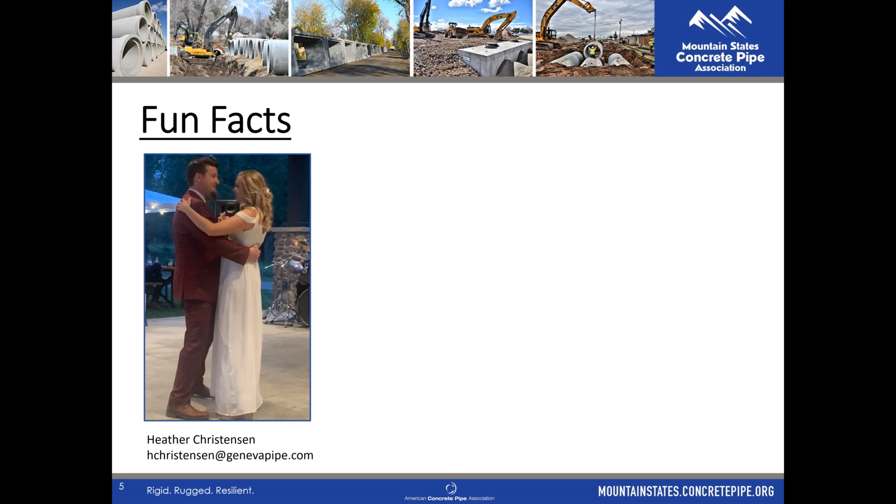But also joining us when they get done with their meeting is Mike Blackham. Mike formerly worked for Oldcastle Infrastructure, left and went into consulting for pipe manufacturers, and now he was hired about a year and a half ago by Geneva Pipe. He is their design engineer and technical engineer. He still lives up in Boise, so he's working out of his home office, but he comes down to the Orem office a couple times a month.

But a fun fact about Mike is that his brother is a professional baseball pitcher for the Oakland Athletics organization, and was traded last year from the Mets organization to the Oakland A's. And so now that he's on the West Coast, Mike and I have talked about going out and watching him play a little bit more, where it was a little bit tougher to get out to New York to watch him play. So we're excited about that.

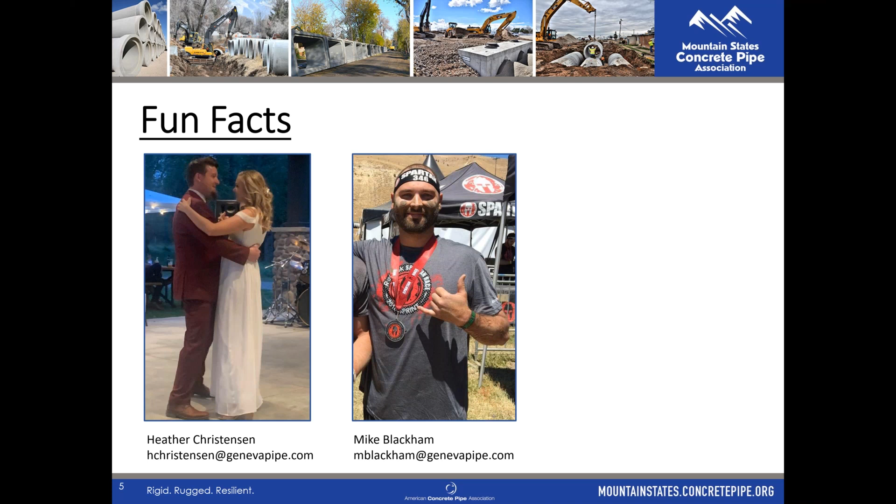And lastly, and we do have him with us on the line today, is Jeff Peck with Oldcastle Infrastructure.

Jeff Peck is the closest human embodiment of the fictional character Ron Swanson from Parks and Recreation. Jeff does not like to be on the grid, just like Ron, and so it was a little bit tougher to stalk him and find a picture of him. So I just decided to show a picture of Ron Swanson because that's kind of what Jeff reminds me of. Fun fact about Jeff is he's the one that got me into guns. Before I met Jeff, I owned 0 guns. When I started working for the association 5 years ago, about a year in, he got me into shooting, and we would go shoot shotguns and different guns. And I had so much fun that Jeff got me into purchasing firearms. So in the last 4 years, I have gone from 0 guns to now I own 10 guns. So that's pretty exciting.

I used to joke around and tell people that I was a Utah Democrat, and they would say, "What does that mean?" And I said, "I have less than 10 guns." And now that I have 10, I guess that might make me a Republican now. I don't know, I'll have to see.

So just got a text from Jeff that his control seized up, and he doesn't have any microphone control, so he can't defend himself either. But we do want to welcome Heather with us. Thank you, Heather, for joining us. I was just giving some fun facts about the group, and you weren't here to defend yourself.

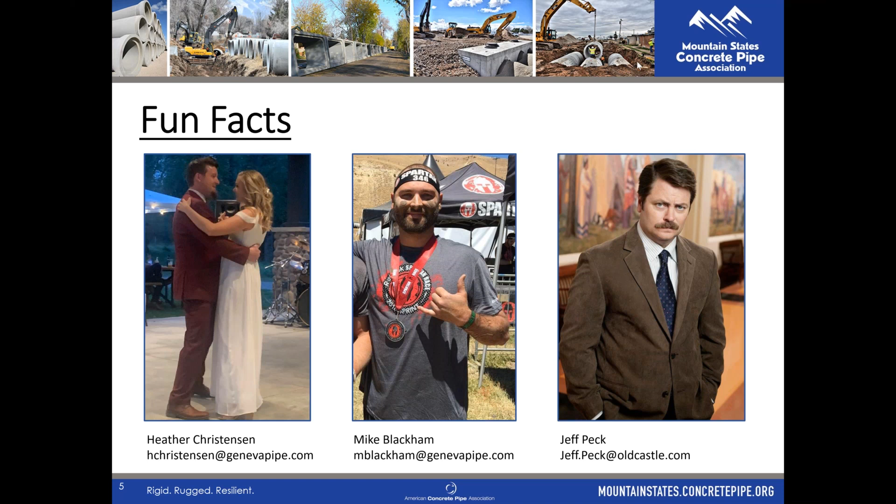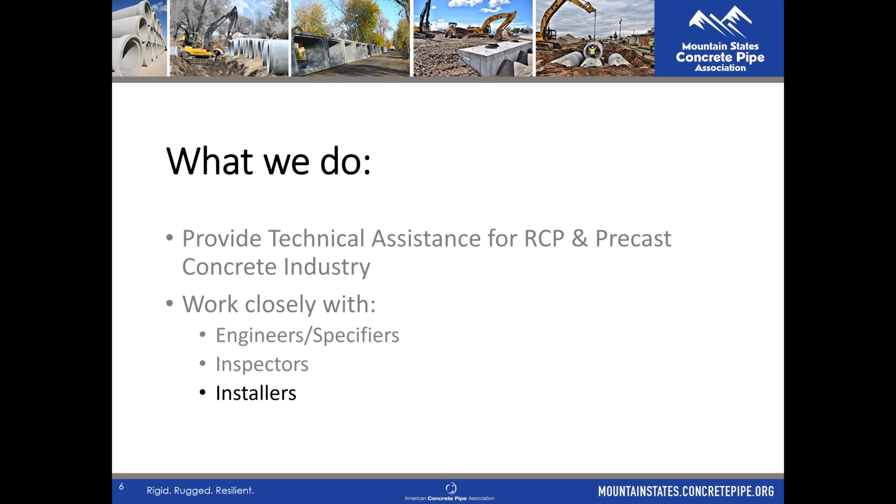So let's talk a little bit about what the association does here. Our primary goal is to provide technical assistance for the RCP, reinforced concrete pipe, and precast concrete industry. And in doing this, we work closely with engineers and specifiers, inspectors, and installers, whether they're independent contractors doing work, or your own city installers, to ensure that our products are being not only designed, but specified and installed and inspected correctly. We want to make sure that our products are going in the ground correctly. That's our number one goal.

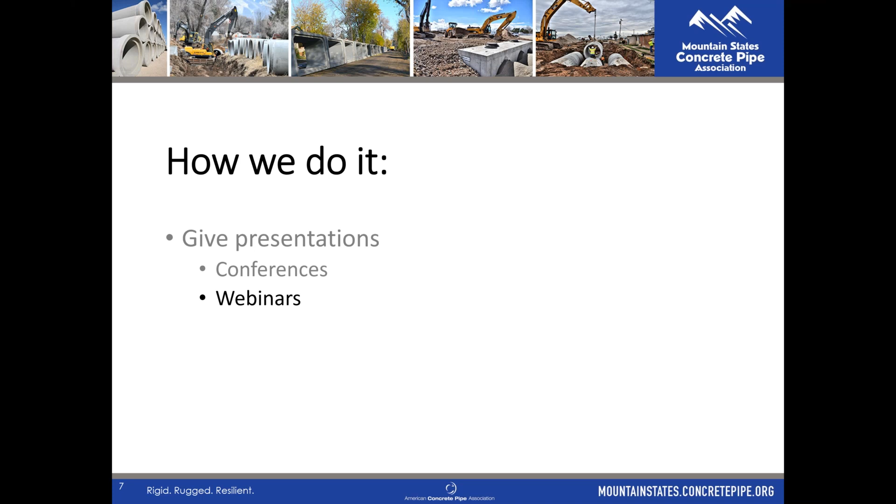And how we do it is we give a lot of presentations, as is obvious by you being here today. We typically present at conferences. Because of the COVID virus and the quarantines and the shutdowns, we've employed more webinars, which have been very successful and very well received. What we like about those is we get to record them and you can watch them at any time. So it's very helpful if you see something that you want to watch again.

But we also have done lunch and learns. We hope that by the middle to end of this year, we're going to be back into folks' offices and be able to do some lunch and learns, bring lunches in and answer your questions there. We also review and write specifications with people. So if you have projects that you're working on and you're unsure how your specifications measure up and you want us to review those, we are more than happy to do that. We have a lot of experience in reading and writing specifications.

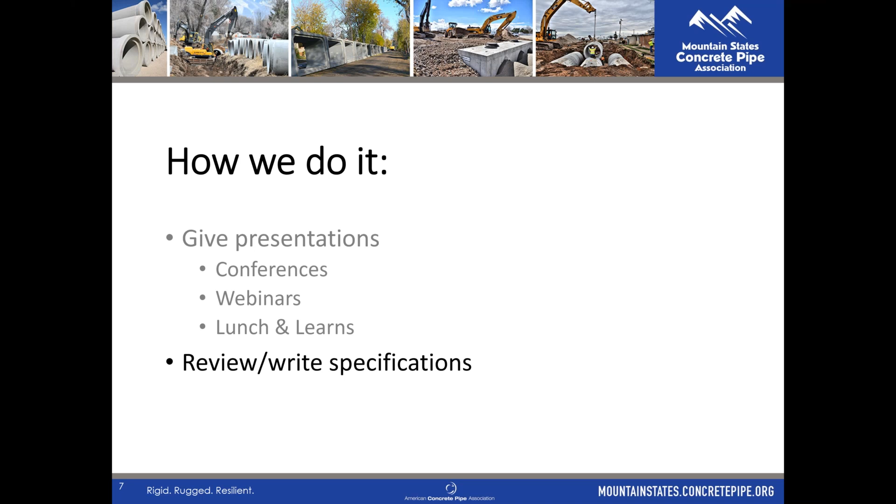Heather, Jeff, Mike, myself, we all sit on national specification committees that work with ASTM, AASHTO, different national specs for concrete pipe. So we have a lot of experience and a lot of contacts across the country with specifications, and we are more than happy to help you make sure that your specs are as good as they can be. We also answer a lot of constructability or design questions. I'll talk about that a little bit later in this presentation, on some of the questions that I've received and how we can help with that.

So it's a really fun job. I really enjoy what I do. I know Heather and Jeff and Mike really enjoy working with people and helping make sure that our products are being spec'd correctly. So it's a lot of fun. If you have any questions, feel free to reach out either by email or phone. We're more than happy to help you out there.

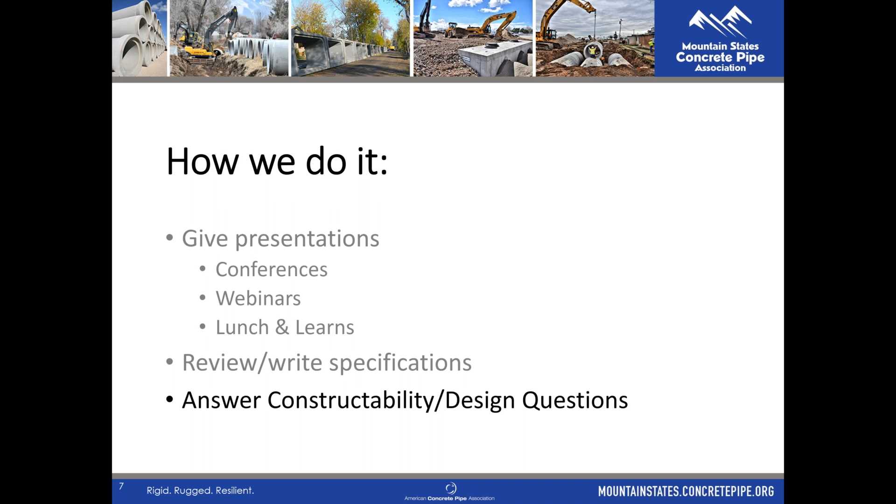So now we've got some new things that we're implementing this year. If you've watched any of our video newsletters from the last couple of months, you've probably seen some of them. First of all, as I mentioned before, this is our first webinar as part of our Mountain States Concrete Pipe Academy. This is a cool new program that we've implemented this year. I put the web address at the bottom of the screen if you want to write that down, or you can go and visit that.

If you go to the website, this is what it looks like. You can click to register for all the various webinars we've got coming up. Once this webinar is over today, I'm going to make it available to register and watch at any time. It'll be on this same page, but instead of being an upcoming webinar, we'll put it under the past webinars that you can still view. So anybody can get on and view this at any time for the whole year. So if you want to go and watch it later, you're more than welcome to. If you miss one of the webinars, you can watch it at any time between now and the end of the year.

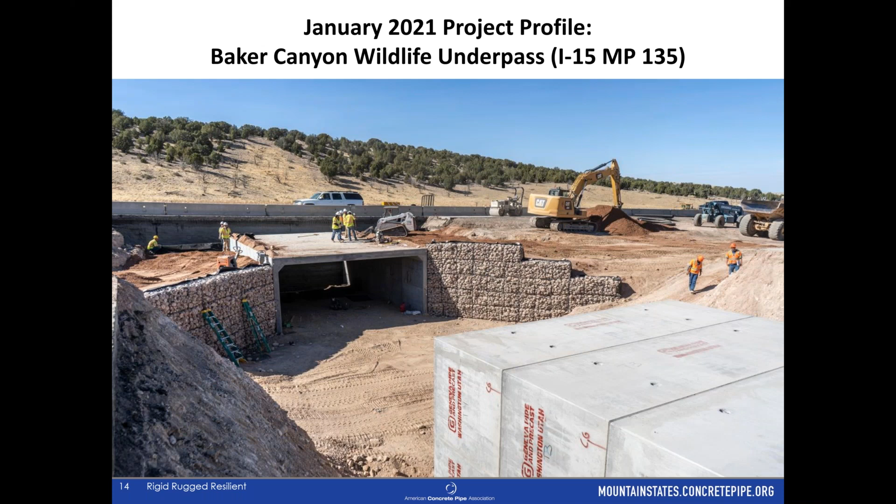But anyways, thank you, Heather, for that information. This has been a great project. It's been recognized across the state. And one thing that we're going to be doing with these project profiles is each month we will be highlighting a new project. So you can look at our website and we'll put it on social media and share it with everybody. The criteria is if it's either reinforced concrete pipe, box culvert, or any unique precast situation that we think would be beneficial for you engineers and designers to look at.

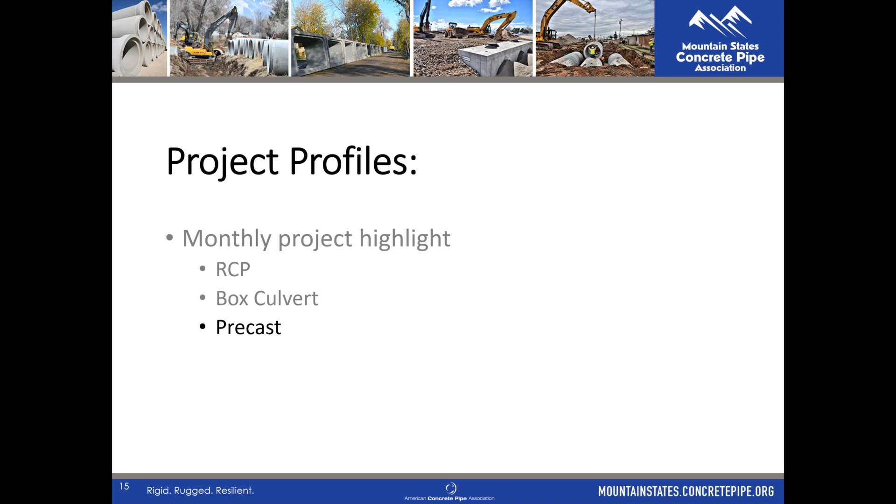And then at the end of the year, from the 12 that are posted on our website and that we select throughout the year, we're going to select one of those to win a Project Achievement Award from Mountain States Concrete Pipe Association.

So we'll be presenting the design engineer, the contractor, and the owner of the project with a plaque and a framed picture that talks about the project, and award them the Project Achievement Award, and hopefully pass those along each year to our national association that does a Project Achievement Award every year as well.

So if you have a project that you've worked on that meets any of those criteria, either a box culvert, an RCP, or any unique precast project that you think would qualify, send that our way. We would love to see what suggestions you have on including a project in this project profile. We'd be more than happy to take a look at those and try to select one to help get some notoriety for you and your project and your company. So keep that in mind. If you want to do that, feel free to just email us and let us know that you would want your project to be considered for that.

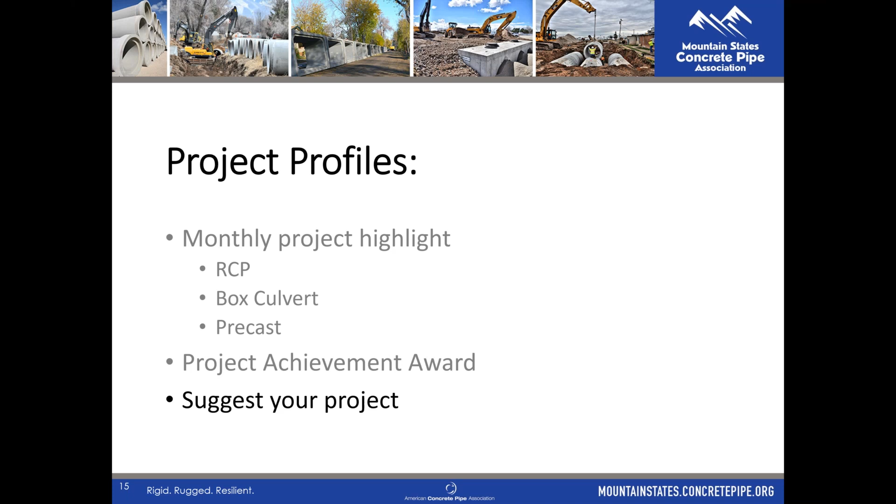Yeah, and one more comment on that, Jason: the American Concrete Pipe Association does their National Project Achievement Award. So that's basically everywhere in the States, but they have different criteria than what we're working with. We want to recognize all precast projects, no matter who the owner is, but for national, it has to be a DOT project. So we'll have to select the ones from the DOT projects that we look at through the whole year and see which ones we can send off to national.

And then what happens is if they get selected as the American Concrete Pipe Association Project Achievement Award, ACPA actually presents them that award at the annual AASHTO conference, if I'm not mistaken. And so that's pretty cool because then that's recognizing the state. So we're looking for a lot of DOT projects, but ultimately the Mountain States Project Achievement Award doesn't have to be confined to just DOT projects. If you've got a really cool job that's not with UDOT, certainly we still want to consider it and put it in as a nomination.

Perfect. I love it. Yeah, that's a great point there. So there are the ones we'll be selecting to pass on, the DOT projects, but to win our Project Achievement Award, it can be any project that was done throughout the year. So whether it's a private, or a city, county, or state job, we'll be selecting from there. Great point, Heather. Thank you so much for that.

All right, some takeaways here. The three big things we're going to be talking about today, and we're going to zip through them pretty quickly: we're going to talk about some basics of reinforced concrete pipe, we're going to discuss briefly some manufacturing and testing criteria, and also a little bit into design.

All right, perfect. Well, let's go ahead and talk a little bit about concrete pipe here, and what the 2 basic critical functions are for concrete pipe. So, buried pipe must perform 2 critical functions. Heather or Jeff, either of you want to jump in and take a stab at what those 2 critical functions are?

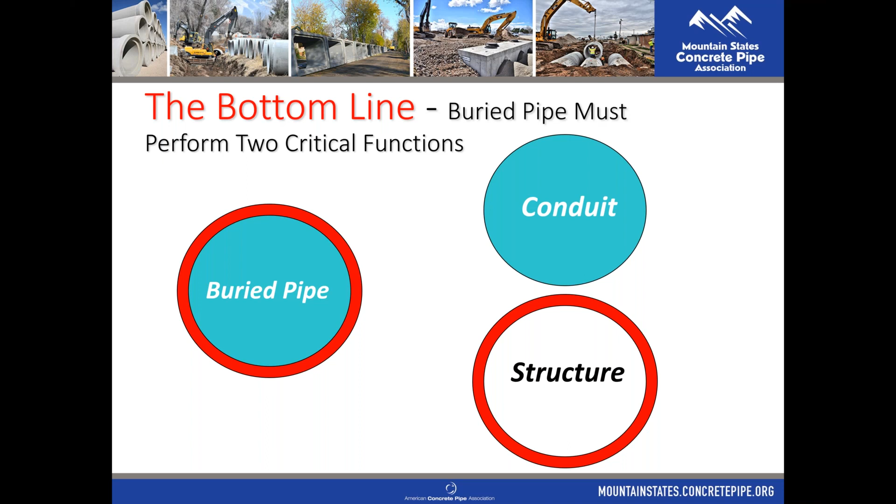Jeff, if you want to jump in, go ahead. Well, one of them certainly is structure. Certainly structure, of course. And the second? Heather, you want to take that one? It's obviously got to be a conduit, so it's got to absolutely convey fluid. Absolutely, conduit and structure. Most of what we do is mostly drainage pipe, so the conduit is typically to transmit the water, mostly by gravity, obviously with sewer or storm sewer. But yeah, conduit and structure.

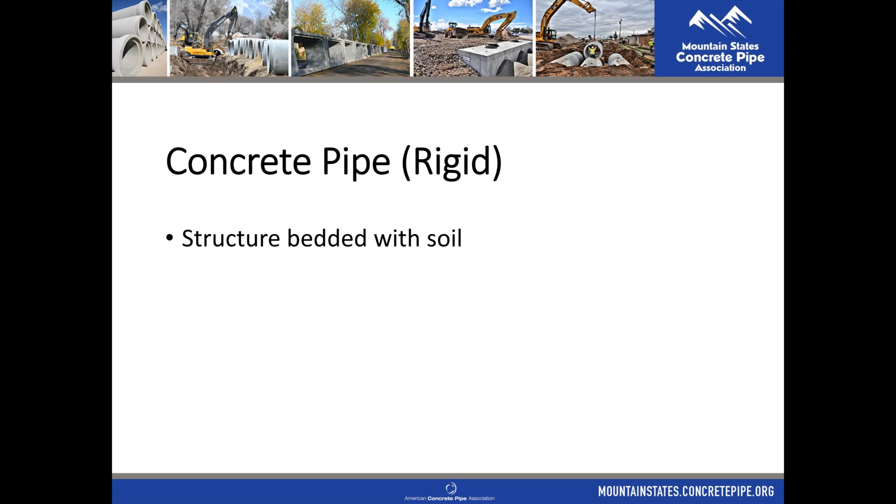Now, concrete pipe is what we call a rigid structure, a rigid pipe, and that is a structure that is bedded with soil. That's a little bit different from some of the flexible pipes, so we're not going to talk about those today. We're just going to focus solely on concrete pipe, but it's a structure itself. So when you get concrete pipe delivered to your job site, we are delivering an actual structure to the job site, and then it is bedded with soil. We'll talk a little bit about the specifications for the installation and the manufacturing of that, but we are building and delivering an actual structure to the job site.

Now, when you look at what percentage of the structural system is handled by the pipe itself, depending on the class, the type of bedding, the foundation and the backfill, you could see anywhere from 70 to 90% of that system strength coming from the pipe wall itself. So that pipe is responsible for transmitting and carrying a lot of that load. It's really remarkable how much that pipe has to handle, right? So it's very important that we take great care when we manufacture it to ensure that it meets the design criteria and the loading criteria, and that it's transported efficiently and safely, so that we're not damaging the pipe as it gets there, because that structure is so important.

As I mentioned before, depending on the class, the foundation and the bedding could account for as little as 10%, up to 30% of the system strength. That's about opposite with a flexible system, where you see 5 to 10% on the pipe itself, and 90 to 95% on the bedding and foundation. So you've got to really be careful, making sure that we're designing and installing these products correctly.

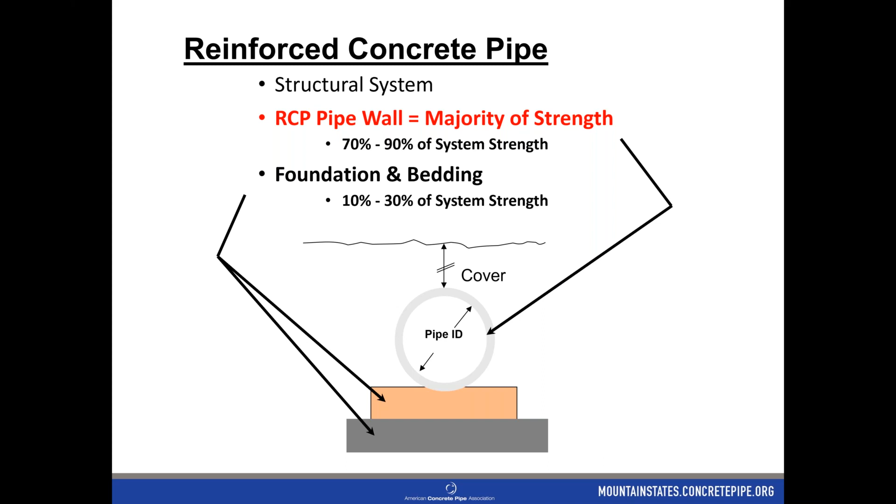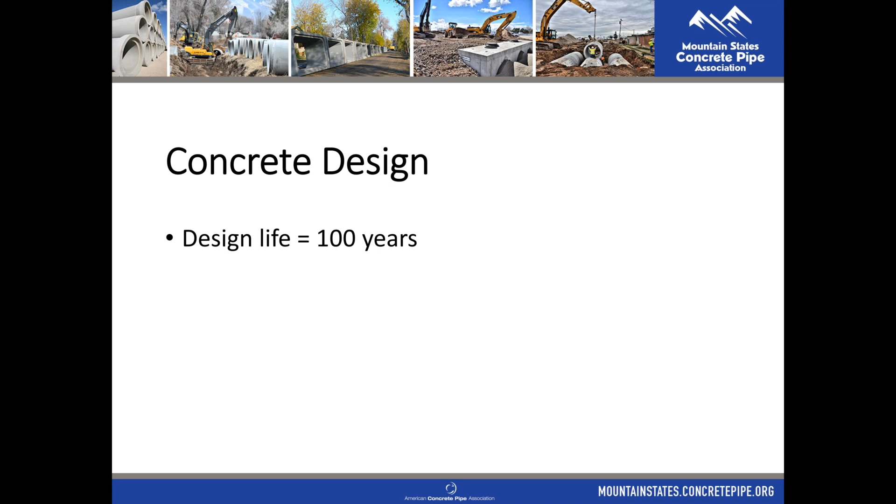A couple of other things with concrete design that we want to keep in mind: your design life for a concrete pipe is typically 100 years, even though we have plenty of projects in the ground that are so much older than that, and I'll talk about some of those in a moment. From a hydraulic standpoint, we're not going to get too much into hydraulics today, but a Manning's n recommended by our plants is 0.012. We'll see different values. I've seen engineers use 0.011. That's okay. 0.013 is pretty common, but we recommend 0.012. Even though in some of our lab tests we've gotten some concrete pipes down as low as 0.009, 0.010, the recommendation is to use a Manning's n of 0.012.

As far as structure, as I mentioned before, each of our plants has structural engineers. Mike Blackham, who I introduced you to earlier, is the engineer for Geneva Pipe. Troy Banks is the engineer for Oldcastle, and they are certifying and stamping these designs. So the plant itself assumes the liability for that structure. We're also assuming that the contractor is handling and installing it correctly, and that it was designed correctly. But as far as the standard classes and meeting those criteria, our structural engineers assume that liability, and they stamp those designs to say, yes, this pipe was manufactured correctly and it will meet these loads.

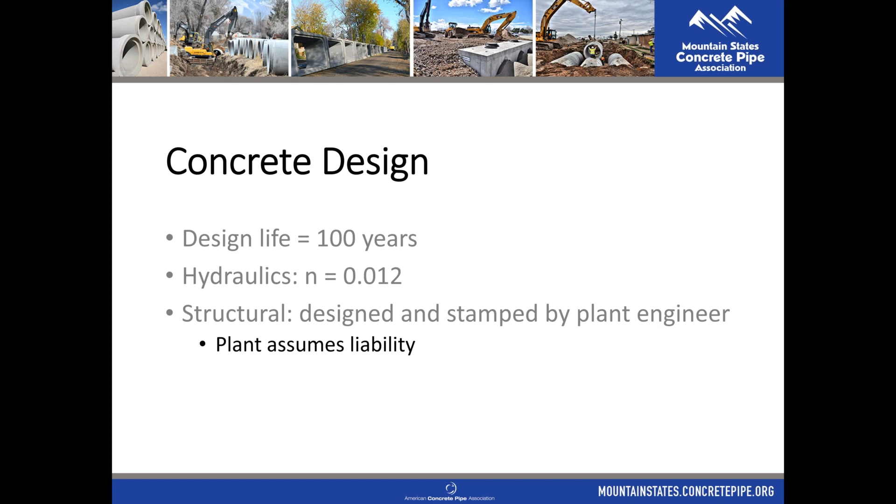This is a pipe that I'm really fascinated by. This was installed in 1842 in Mohawk, New York. This was an old sewer line that they upsized in 1986, so it was in the ground for almost 145 years, 144 years old when they removed it. It's interesting because if you go to the American Concrete Pipe Association's office in Dallas, Texas, they have a section of this pipe in their office so that you can go and look at it.

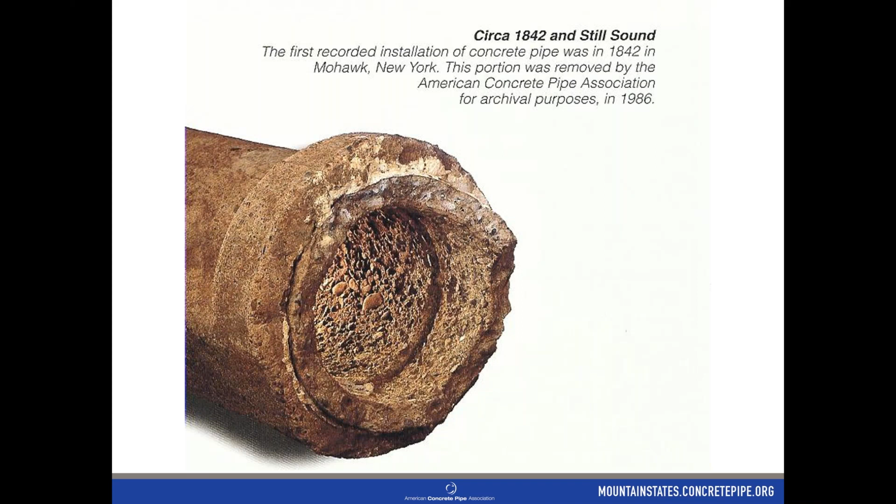Structurally, this pipe was still fine. It still met all the structural requirements that it needed to after 144 years in the ground. The only issue was it was too small. They had some growth and needed some additional capacity in that line, so they upsized it after 144 years. And so structurally, it was still very sound. And so these pipes, they can last. We mentioned 100-year design life, but some of these pipes will last even longer than that.

This is an interesting project that's more local. That one in New York, that was an old pipe. This is one in City Creek down in downtown Salt Lake. Back in 1908, there was some major flooding in City Creek, and so they decided to pipe a large portion of that. And so they put in a 7-foot diameter pipe from 400 West to 900 West. This was back in 1909.

And for any of you that were wondering, for that 4,000 feet of 7-foot diameter pipe back in 1909, the low bid was Davis and Huser, and they bid it for $48,252 for 4,000 feet of 7-foot diameter pipe, 8 inches thick, reinforced. So kind of a cool little project there.

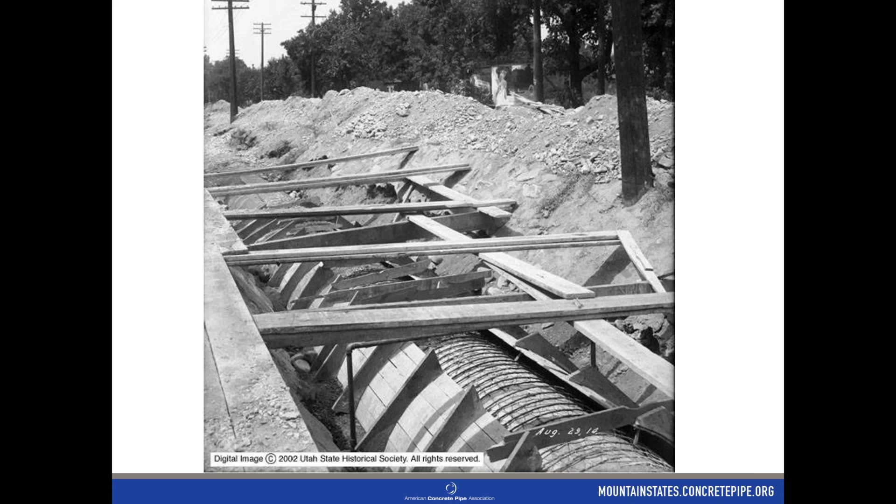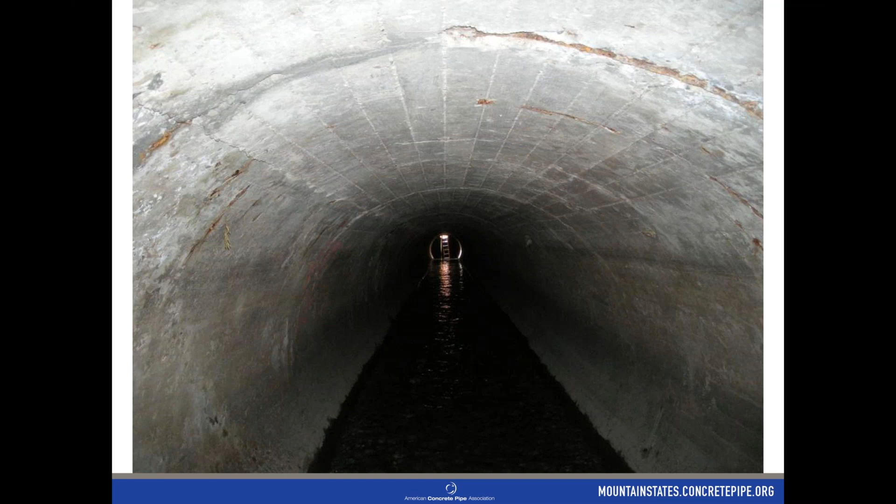Here's some more pictures of it. You can see the forms that they've set and the steel that they've got in there. And this is that same location completed after they stripped the forms. And this is what it looks like today. A large portion of that pipe is still in service today, and it's still functioning fine after over 110 years. Kind of a fascinating thing there.

So one of the things that the American Concrete Pipe Association has that you as engineers can use is a cool little app that they've developed that's a free download. Just look for the Compare Flow app in the App Store, whether you're using Apple or Android products. You can download it to your phone, and you can compare flows of different products and different materials.

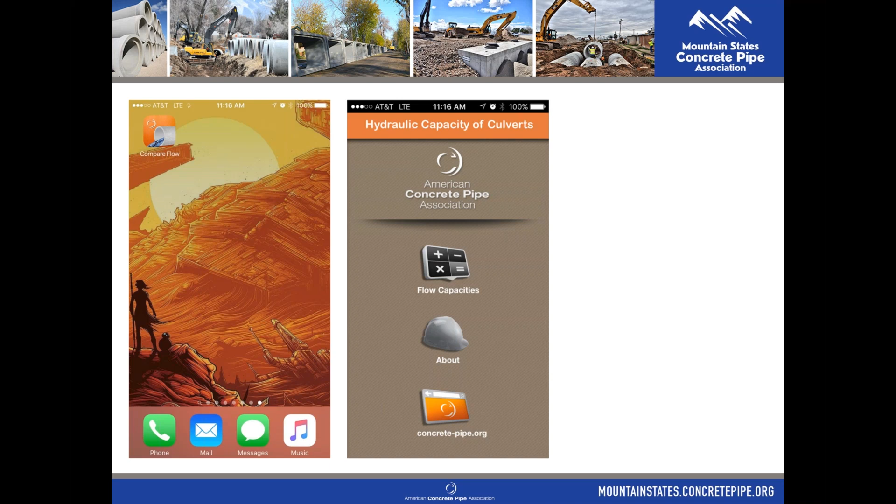And so if you want to do just a quick calculation to see what size of pipe you're going to need, whether you want to use concrete pipe or plastic or corrugated metal, or if I can't do a round, what if I need to do a box culvert, you can compare flows of different things. This is what the app looks like when you download it. It's just that little orange app in the top left-hand corner there. When you open it, it's called the hydraulic capacity of culverts. You go to the flow capacities, this screen opens up, and you can choose circular concrete pipe.

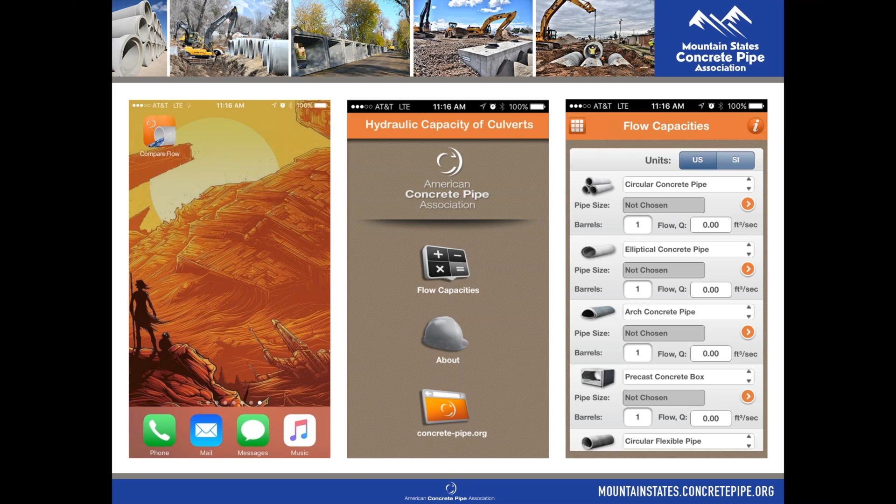We get a lot of questions about elliptical pipe. What's the flow difference? What's the change? So you can look at elliptical or arch. We don't make a whole lot of arch in this market, but usually we get most of our questions comparing between circular, elliptical, or box culvert. You can also enter in flexible pipe and see what the difference in flow capacity would be from those corrugations versus a smooth lined pipe.

It's kind of cool. This is the output once you punch it all in there. This is for a 24-inch pipe with a roughness coefficient of 0.012, and it gives you your flows down there at the bottom. You can choose different materials. So whether you want to look at a profile walled PVC or a solid wall or SRHDPE, corrugated metal, it changes the Manning's n and shows you the difference between different pipe flows.

And so you can see that if you're comparing a concrete pipe versus a corrugated metal pipe, one can handle almost 35 cubic feet per second, the other one's only 23 cubic feet per second. So it's a pretty big change when you start thinking about the corrugations and different pipe materials. So that's a free app that you can download.

It's kind of cool to have just on your phone if you're out in the field and you need to do a quick calculation and see what flows are. Feel free to download that. It's kind of a cool little thing there.

Heather, go ahead. One other thing is if you're interested in using this app, or maybe you want a little bit more information, I know ACPA, American Concrete Pipe Association, did a webinar back in 2020, and I believe they threw it on YouTube. So Corey Frazier, I think up in Washington State Concrete Pipe Association, and then Trig also put together a presentation on this. They did a really good job. They went a little bit more in depth. So while we can't go that in depth in this presentation, if you're looking for more information, shoot Jason an email. He can send you that link to that webinar too.

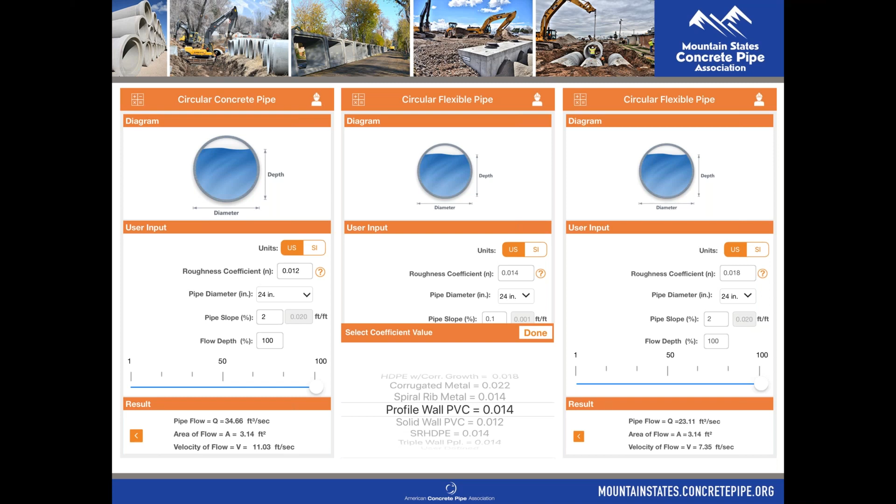So let's talk a little bit about specifications. I know all you engineers out there, this just gets you really amped up and excited about talking specifications. There's three main specs for reinforced concrete pipe. The ASTM C76 is manufacturing spec. As I mentioned before, Heather, myself, Mike Blackham, I believe Jeff Peck, a couple of others from Oldcastle, we have people that sit on these ASTM. It's called C13, the committee that writes all these specifications and approves them. And so we sit on there and we have discussions with other engineers about these specifications.

But you've got C76, which is manufacturing, C497, which is your testing spec, and C1479, which is installation. We're going to focus mainly on C76 today and a little bit of C497. 1479, when we talk about the installation of concrete pipe webinar that we'll be doing in a few months, we'll be focusing almost exclusively on 1479. So we'll talk a little bit more about that later, but we're not going to focus on that one today.

Actually, you know what? Let's go ahead and do our second poll right now. I'm going to pull up the second poll. And the question is, how many standard classes of circular RCP are there? These are standard classes. This is not like special design. How many standard classes? 3, 4, 5, 6.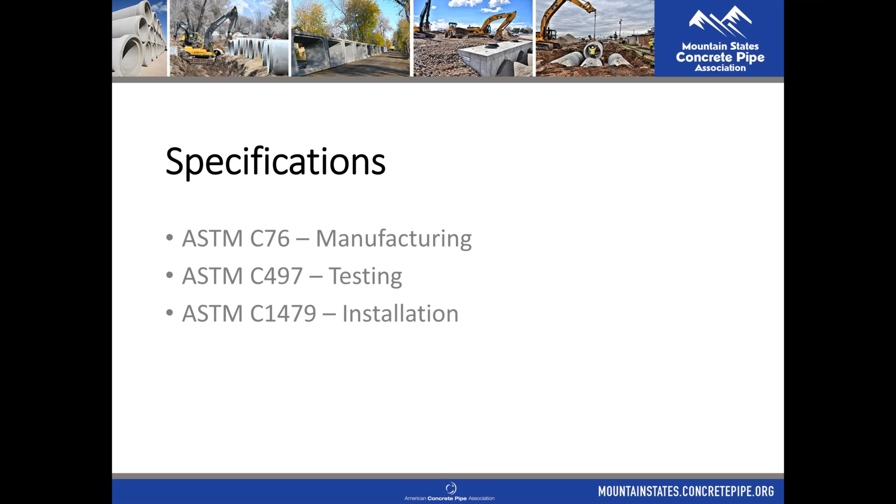So we want to make sure that we have steel in those tension zones to ensure that we're not cracking the pipe. We know that concrete is going to crack if it's loaded. So we want to put steel in there to either minimize the cracking or eliminate it altogether. Because the tension zones are on the inside of the pipe at the flow line, which is the bottom, and the crown, which is the top,

you're going to see the cracks manifest on the inside of the pipe there. But the tension zones at the spring line, which is that midpoint, if you were to cut the pipe in half horizontally, it would be that horizontal line right in the middle of the pipe. That is called the spring line of the pipe. And you see the cracks happen on the outside of the pipe because those tension zones are on the outside.

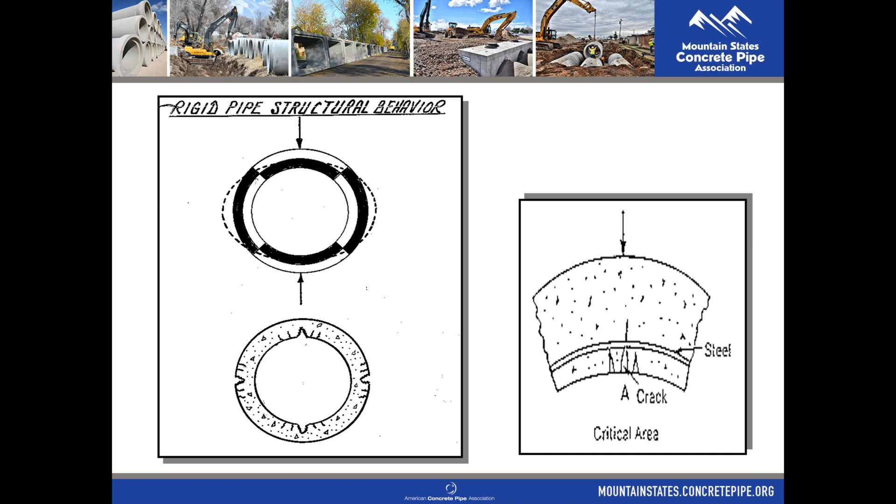And then you've got ultimate load. Ultimate load is once you load that pipe up to the failure point. We want to know at what point it's failing, right? So when you go through this table, on the left-hand side you've got the pipe diameter. This is the inside diameter of the pipe. You've also got your different wall thicknesses, wall A, wall B, and wall C.

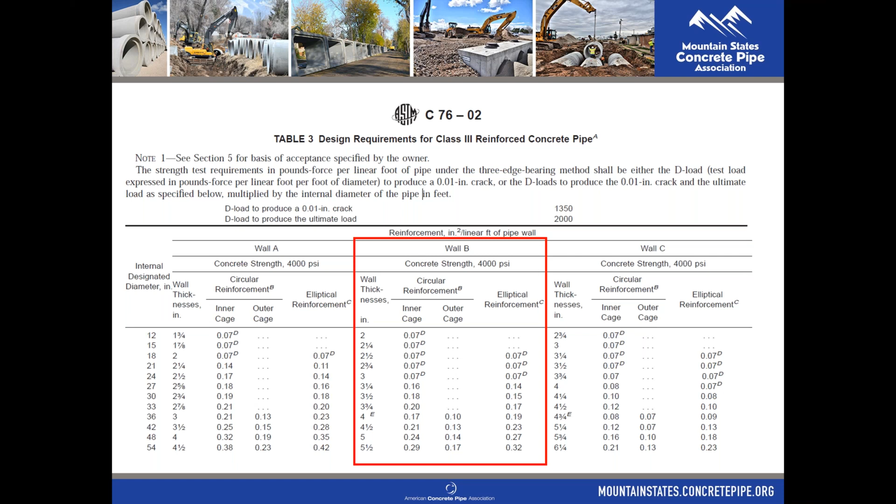Wall B is the most common that we use in our market here. You see a lot of B wall, and B wall is cool. Those are the forms that we're using, and the B wall is nice because it has a real easy way to calculate your wall thickness. But as designers, we need to keep in mind what our wall thickness is, to make sure that we're calculating the correct cover and the correct cover requirements.

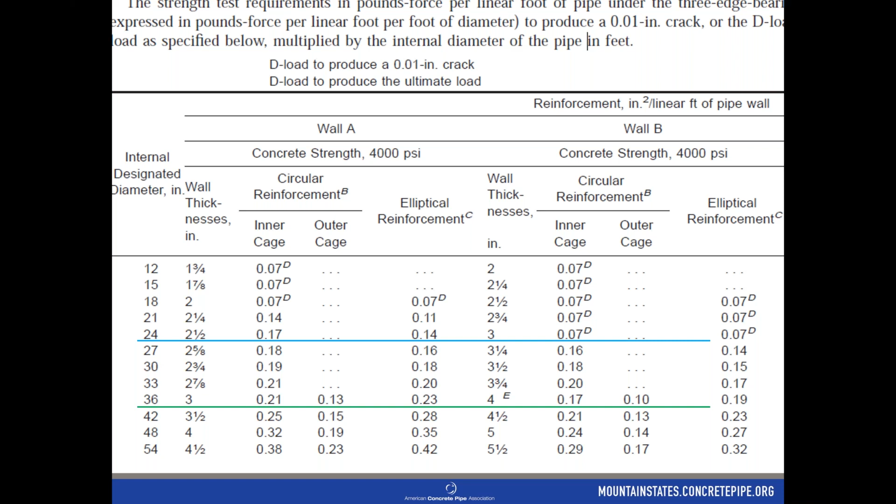So the simple calculation for wall thickness on a B wall is you take the diameter in feet and you add 1 inch to it. So for a 24-inch pipe, that's 2 feet in diameter, and then you add 1, so 3 inches is the wall thickness. If you had a 36-inch pipe, that would be 3 plus 1 inch, 4 inches thick. If you have a 30-inch pipe, notice I didn't highlight that, but 30 is 2.5. You add 1 inch, it would be 3.5 inches. So it's actually really easy to calculate that.

For strength classes, as Heather mentioned, there are 5 strength classes. Class 1 is going to be 0 to 800, and that is pounds per foot of diameter per foot of lay length of pipe. So pound per foot is not pounds per foot squared. It is pounds per foot of diameter per foot of lay length of the pipe. Class 2 is anywhere from 800 to 1,000 pounds. And this is the load to produce that 100th inch crack.

Class 3, as I said, is 1,000 to 1,350. Class 4 is 1,350 to 2,000. Class 5 is 2,000 to 3,000 pounds, and anything above that would be your direct design. So anything that's over 3,000 pounds per foot, we would do a special design for that, and that's why we have structural engineers on staff.

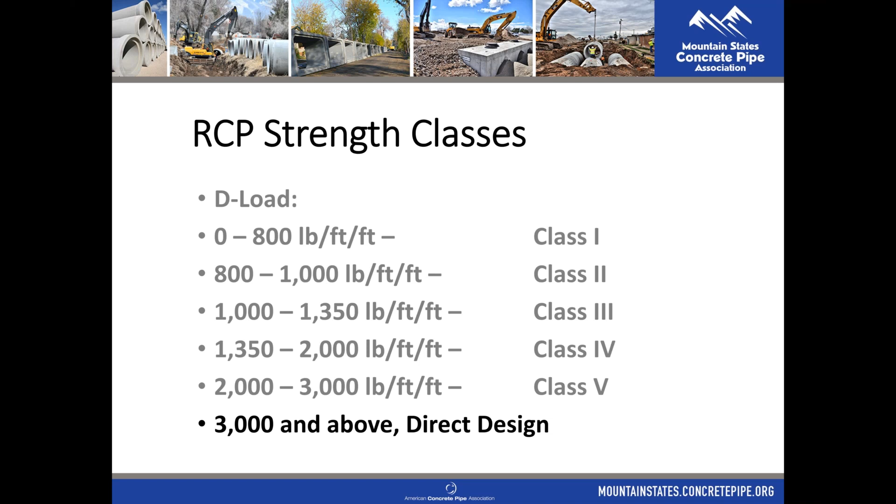Now, people always ask, well, what about that 100th inch crack? Tell me about that. So we do a 3-edge bearing test, and I'll show you some pictures of what that means. It determines the strength of the pipe for 2 different criteria. Number 1, the load to produce a crack with a width of 1/100th of an inch. We have a little leaf gauge to determine how much we're loading to create that 100th of an inch crack. And then the ultimate load is that failure load.

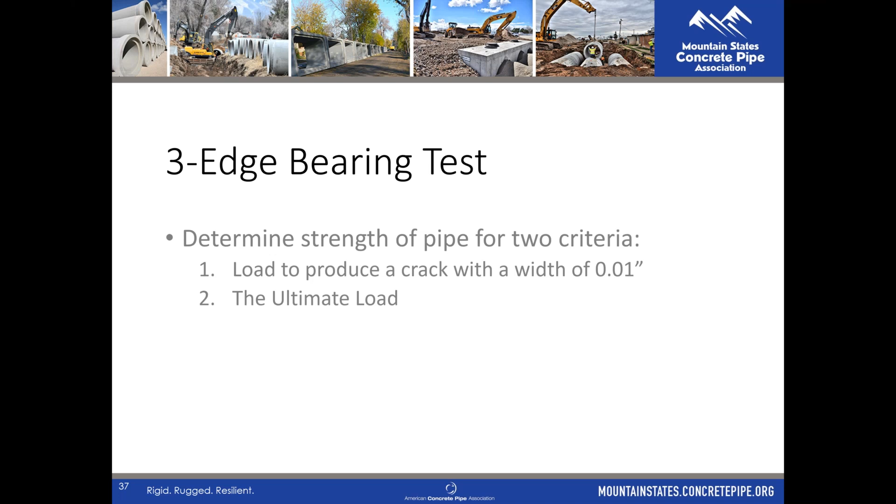Once you take a pipe to ultimate load and you crush it and it has an ultimate failure, that pipe cannot be used anymore. That is a failed pipe. We throw that one out. And we have so many that we have to do per spec. But the 100th inch crack is an interesting phenomenon, because on small cracks, we call these hairline cracks, there's a phenomenon in RCP known as autogenous healing.

Now, when I was first told about this, I thought this was black magic, I thought it was fake, and I thought Randy was just messing with me. But this is a real phenomenon, and we actually did an experiment to show this. It's on YouTube. If you look up autogenous healing, you can see the experiment that Mountain States did a couple of years ago. We cracked a pipe to about a 5/100th of an inch crack, about 5 times more. That's about the width of a dime. And we cracked the pipe all the way through.

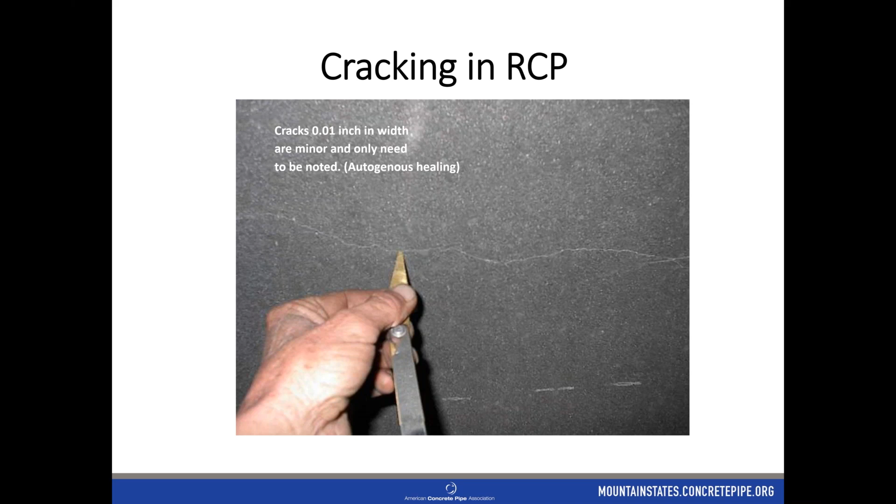Then we sealed the bottom with concrete, and we filled it up with water for about 3 months and allowed it to heal itself. We kept water in it the whole time. We stood it up on its end and just put a hose in there and let water run through it. At first it was leaking very bad, and then within about a week it sealed itself completely up. Within 3 months it had healed all the way through the pipe. It wasn't leaking anymore, and you start seeing this white efflorescence in there.

What it's doing is you've got the calcium hydroxide in the cement mixture that mixes with the oxygen and the water and the carbon that's in there, and it creates this calcium carbonate, or limestone, that seals the crack and actually becomes stronger than the concrete itself. Limestone is actually stronger than the concrete mix. And we retested it. We put it back on the 3-edge bearing test and reloaded that pipe, and it ended up having 23% more strength than when we originally cracked it. And it cracked in a different location, so it was actually stronger in that spot.

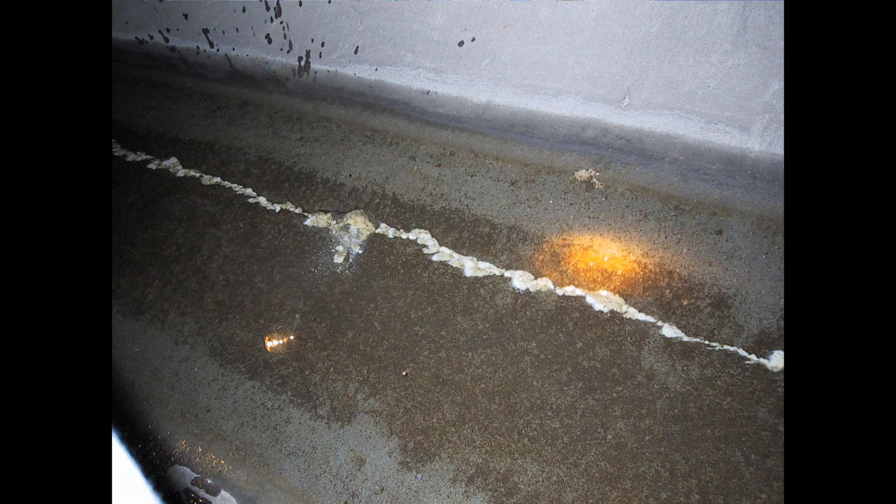And so it cracked at a different spot, but it actually made the pipe stronger to just sit and heal itself for 3 months. It was kind of a fascinating experiment.

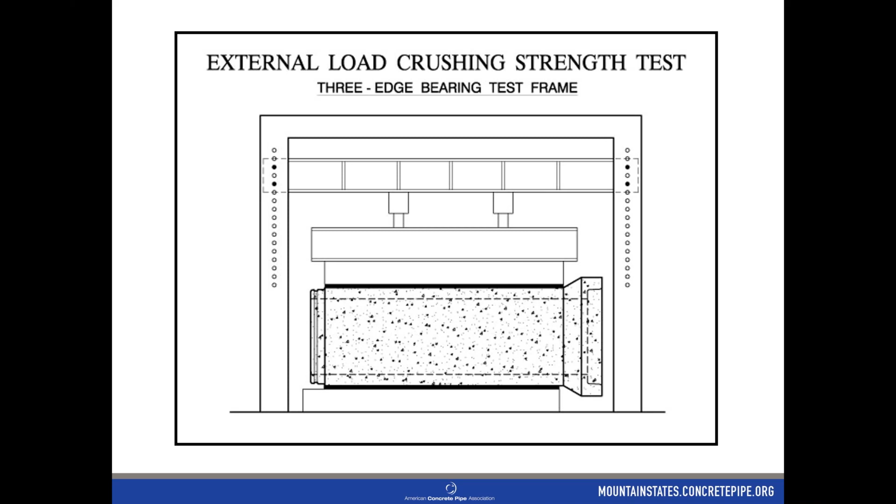As I mentioned before, this is the 3-edge bearing test, or the D-load machine. I'll show you some real life pictures. On the left is back when Jeff Peck first started in this industry. This is how they were doing it. Notice they used to wear those fedoras and suits and ties, and they'd just throw bags of cement on top of it. You know, that was 100+ years ago when Jeff first started in this industry.

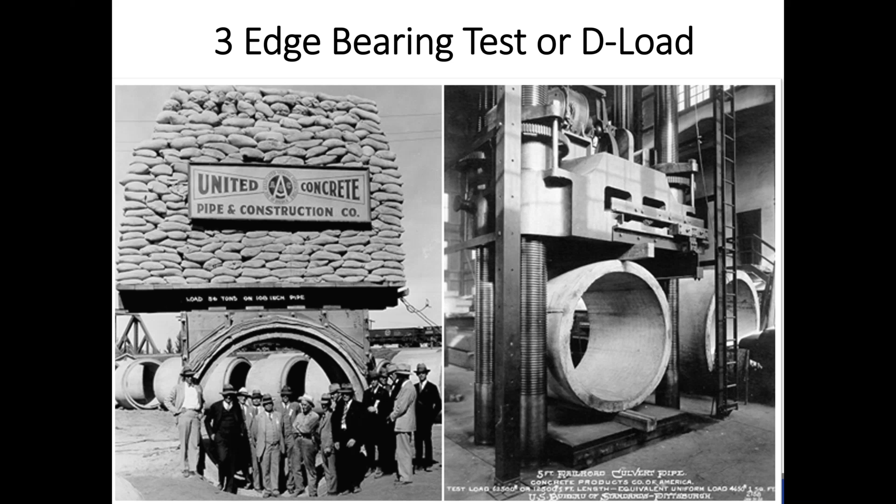On the right is an actual D-load machine, where it's a hydraulic press that they load. This is what it looks like. If you notice, they call it a 3-edge bearing test because there's 3 points of contact on this pipe. If you notice the 2 and 3 down at the bottom, they space those out, and they want to space it because you don't want the pipe to roll on you. That could be a big safety hazard.

If it's only 1 point, then it could roll on you, but you're trying to duplicate a point load as much as possible. So at the top you've got 1, and then at the bottom you've got your 2 and 3 loads. So those are your 3 edges that are supporting that pipe.

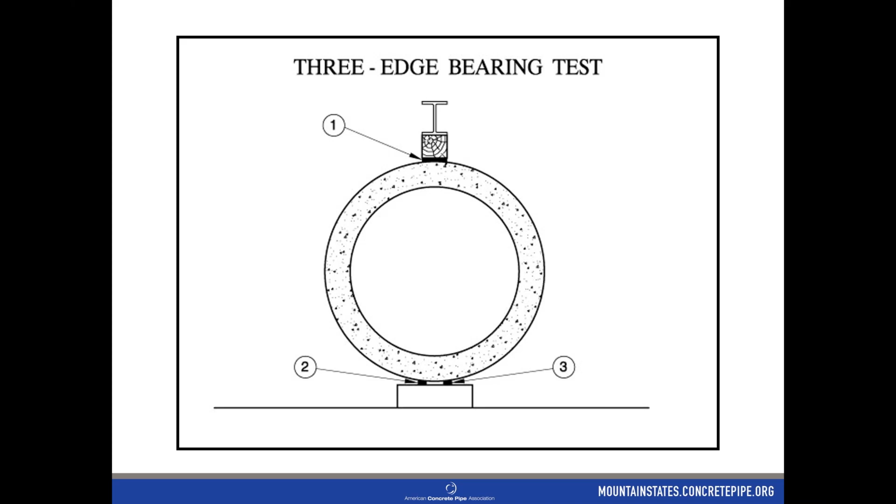On the top, we usually have a rigid steel beam with a wood beam underneath it, and that wood beam takes away some of the shock there, and then they'll sometimes put a rubber strip on there as well underneath the beam. You don't want the steel beam in direct contact with the concrete, because that connection point can be really harsh. So you want to put something in there to kind of brace it, either rubber or wood.

It'll compress a little bit, but after it reaches compression, it's going to get you that load number real easy without damaging the outer part of the concrete and causing unnecessary cracking too early. If you notice down at the bottom, depending on the diameter of pipe, there's a requirement for how close you want those rubber strips. So for every foot of diameter pipe, you put it 1 inch. So if it's a 24-inch pipe, they're 2 inches apart. If it's a 48-inch pipe, they're 4 inches apart.

I had someone telling me, man, we're getting such high D-load numbers. We don't know why they're so high. They're about double what they should be. And I noticed that they were running a 24-inch pipe, and then they didn't move the beams in for the 24-inch. So those strips were too far out, and so we made the adjustment, and then they started getting the numbers they were expecting.

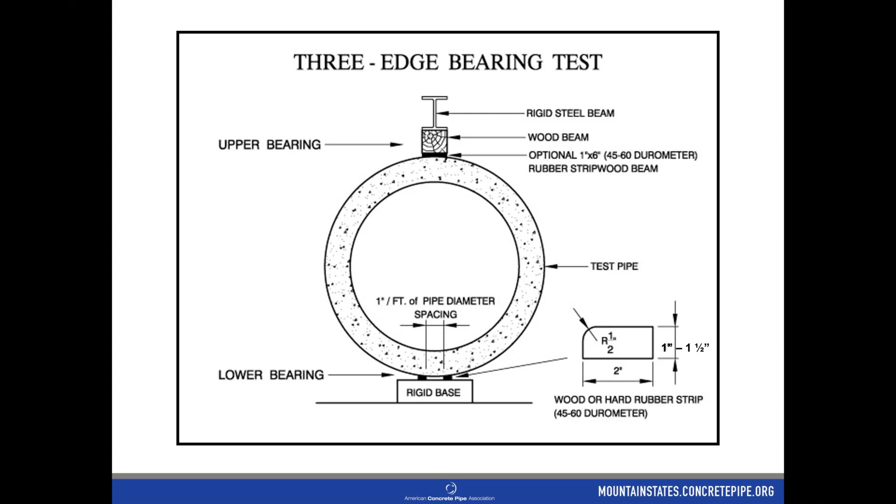They weren't as high as they thought. They thought, man, what's going on with our mix design? Why is it so high? But it just turns out they just didn't move those strips in. So we fixed it and ran the pipe again and got the numbers that we were expecting. So you gotta watch out for that. That's a big one to keep in mind.

So these are the rubber strips that you can see. They're a little bit rounded, so the pipe is cradled there. This is what it looks like.

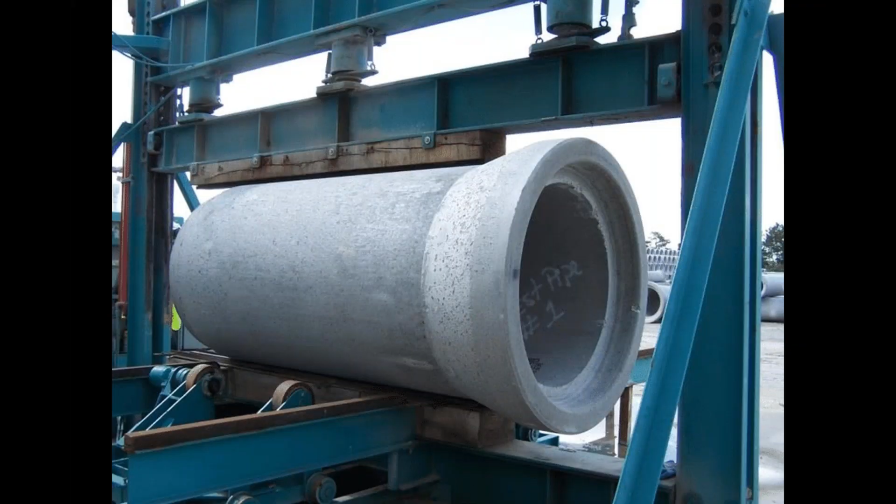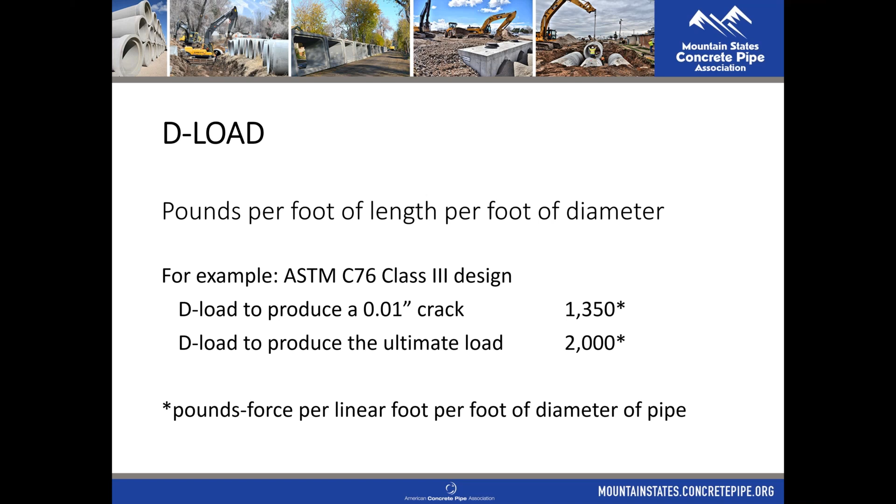So this is the calculation, very simple, for a 24-inch diameter Class 3 pipe. For our 0.01-inch load, we'll go 1350 times 8 feet. These pipes are 8-foot segments, times 2 feet of diameter. We come up with 21,600 pounds. So if we can load that pipe to 21,600 pounds and we don't see a crack, we know it meets the Class 3 requirement.

And so then we take it off the machine and we say, all right, that batch is good. We're going to test another one with the next batch. For ultimate load, we do the same calculation, 2,000 pounds times 8 feet times 2-foot diameter. So for a Class 3 24-inch diameter pipe, 32,000 pounds is the ultimate load.

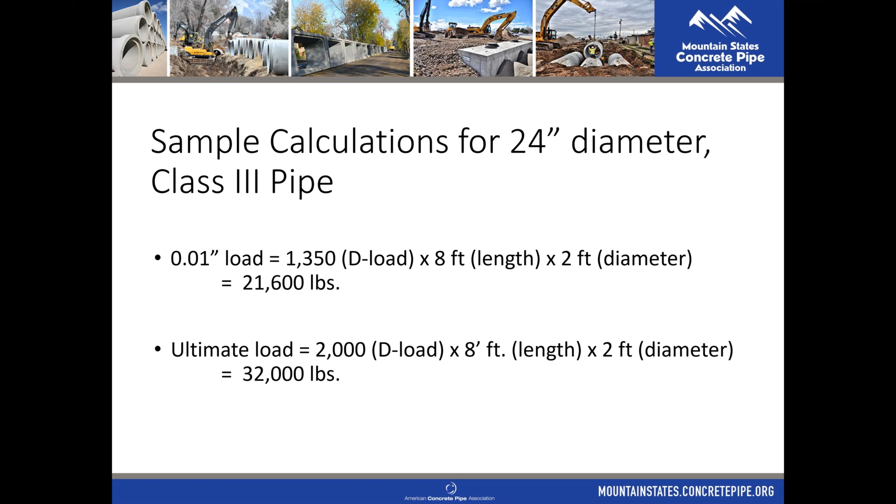So if you load it and it hasn't failed yet, and we get up to 32,000 pounds, we know it meets ultimate load. So that pipe there, we check it for the 100th of an inch crack and the ultimate load, and we know it meets our Class 3 requirements. So let's do a quick poll before we talk about what you show on the plans.

We're going to do our last poll here. All right, I'm going to launch it here. We'll go real quick because we've only got about 10 more minutes here together. So how many standard classes of elliptical RC pipe are there? So your answers are 3, 4, 5, or 6. How many classes of elliptical pipe are there? Okay, I'm going to give you about 15 more seconds. All right, 5 more seconds. 3, 2, 1, get your votes in.

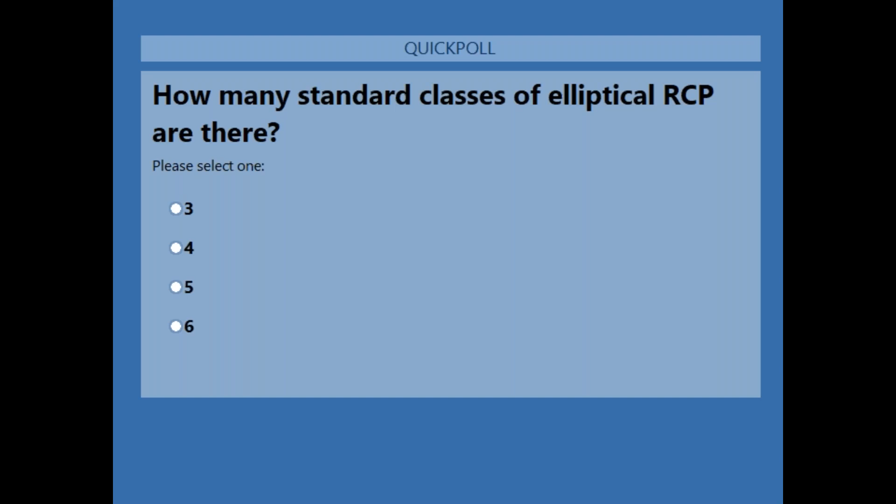All right, I'm going to share that with us here. Here we go. So 41% said 3 classes, 29% said 4, 27% said 5, and 3% said 6. Jeff, do you want to give it a stab?

There are 5 classes. There are actually, of elliptical? I'm sorry, I got on a phone call, so I'm out in left field here, Jason. I apologize. Sorry. Standard classes of elliptical.

Congratulations, those of you that said 3, you are wrong. It is not 3. For those of you that said 5, congratulations, you are also wrong. So for elliptical class, there are 4 standard classes of elliptical pipe. There is no Class 5 elliptical pipe. So if you put on your plans a Class 5 elliptical, that is not correct. It's Class 1 through Class 4.

And in the fill height charts I'm going to show you in a moment, when you look at those, you've got vertical and horizontal, so they're different. The pipes are different. The reinforcing and stuff are different. So for elliptical pipe, there are 4 standard classes.

Apologize, Jeff, you got distracted there, and I set you up for failure there.

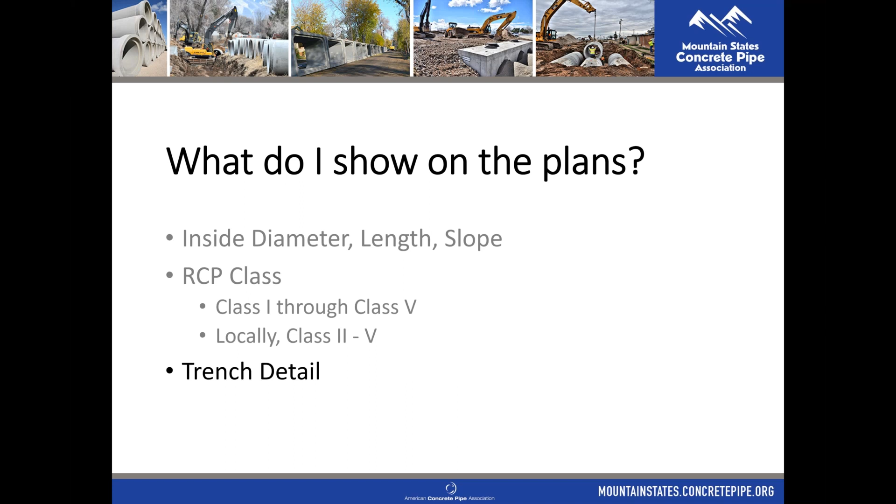So we're going to get back into what we show on the plans and go through this quickly here. What do we show on the plans? Well, we show inside diameter, length, and slope. We show the RCP class. We mentioned there's 1 through 5, but locally you'll rarely see a Class 2, but every now and then, if it's a large diameter or irrigation project, you might want to spec out a Class 2. But mostly Class 3 through 5 locally is what we do. And you'll want to put a trench detail on there so that the contractor knows how to install it and what type of bedding you're using.

So then the question is, which class do I specify? Boy, which class do I specify? Well, there are 3 different ways that you can determine which class to specify. Number 1 is the PipePac software. You can do your own indirect design and determine what it is, and we'll talk a little bit about that at the end, but not much.

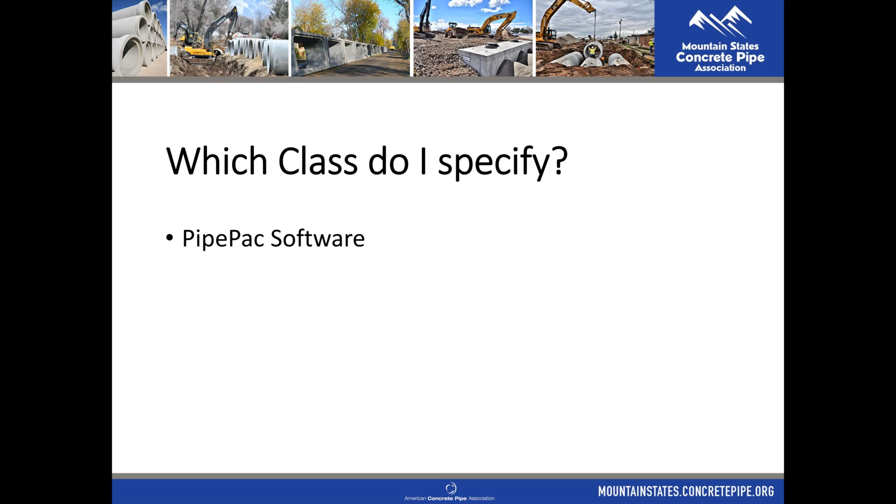Fill height charts is the most common way to do that, and you can download those at mountainstates.concretepipe.org. And the best way is just give me a call. Ask me. Let's talk about it. I'll pull up the fill height charts. We can talk about what class you should specify. We can talk about your loading, your fill requirements, and I can answer.

And you never know, you might get a good joke or something out of me. You might get a good story. Speaking of which, Heather, got a question for you here. Why did the number 4 not ask the number 5 to prom? Do you know? Do you know why 4 didn't ask out number 5? I have no idea. Because it was 2 squared.

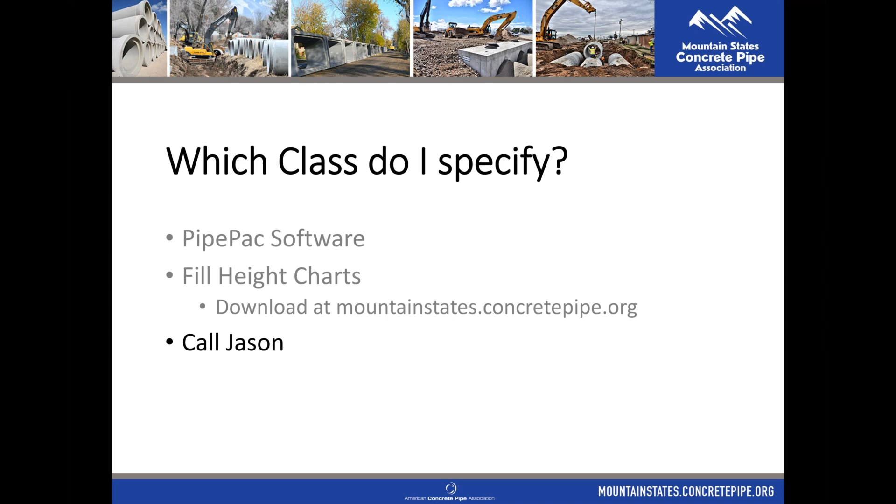That's the level of joke you're gonna get if you call me and ask me what class of pipe. You might get jokes like that. So I'm just saying, number 4 didn't ask out number 5 because it was 2 squared. You're welcome. Use that one today.

You're welcome. Okay. If you go to our website, down on the bottom of the home screen, there's the fill height charts you can download. However, if you noticed, I provided 2 handouts for you on this presentation. So if you want copies of those fill height charts, those are available to download as handouts of this presentation. So there's a little handouts tab there on your control panel. Click those. Those are both available there in PDF. Feel free to download them, and then you've got access to them.

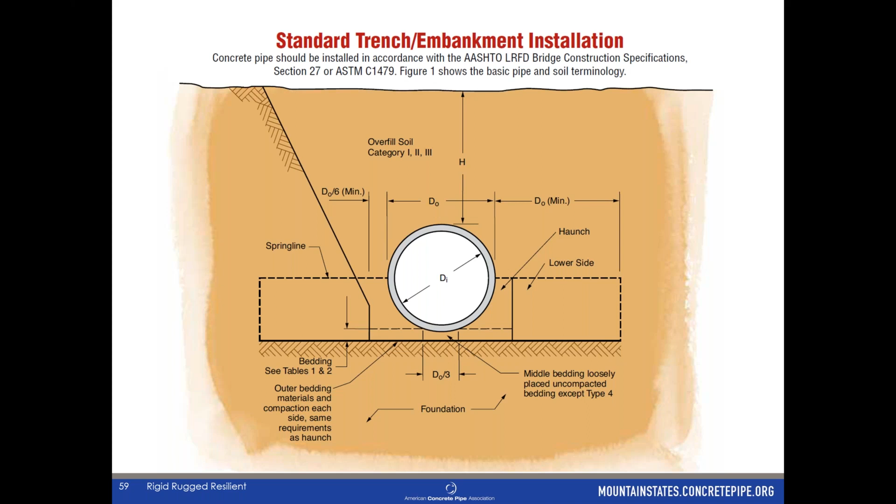So an embankment is basically, when we install an embankment style, you put the pipe on the ground and then you build up around the pipe. So it doesn't have the benefit of that friction force of the sidewall of the trench. About 99% of the installation that I've seen in Utah is trench. And even when it is embankment, usually they'll do like a positive embankment trench where you build the embankment and then they trench and open it up and then install the pipe. And so it's a little bit different. It's not the same as a standard embankment. So these are very conservative, but keep that in mind.

This is the type of installation. The way that I say it is type 1 is your primo installation. This is like your typical federal, your FHWA, your DOTs, your airport, your railroad requirements. That's a type 1 installation. You've got high compaction, really quality material, and your bedding and your backfill is really good material there. Your type 4 is going to be your no compaction, your native materials. You're just throwing it back in the trench.

So type 4 installation, you're going to save some money on the backfill and the material, but you're going to spend more money on a higher class. Type 1, you're going to spend more money on the backfill and bedding. You're going to spend less money on the class of pipe. So kind of balance those out a little bit there. Type 2 bedding is typically what you'd see in a municipal project. Sometimes I'll look at a type 2 and a type 3, see how close they are in classes, because if you spec out a type 2, if you're not out there inspecting and making sure it's being installed correctly, you may get a type 3 installation. So you got to be careful with that with your contractors.

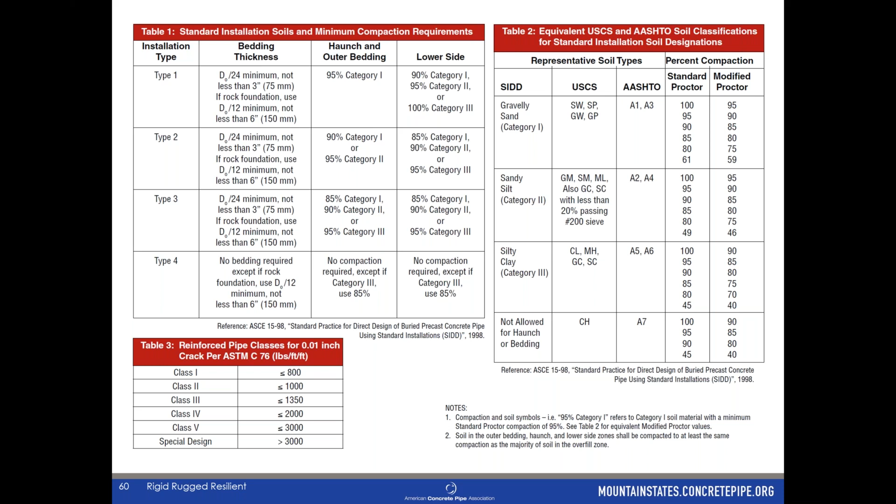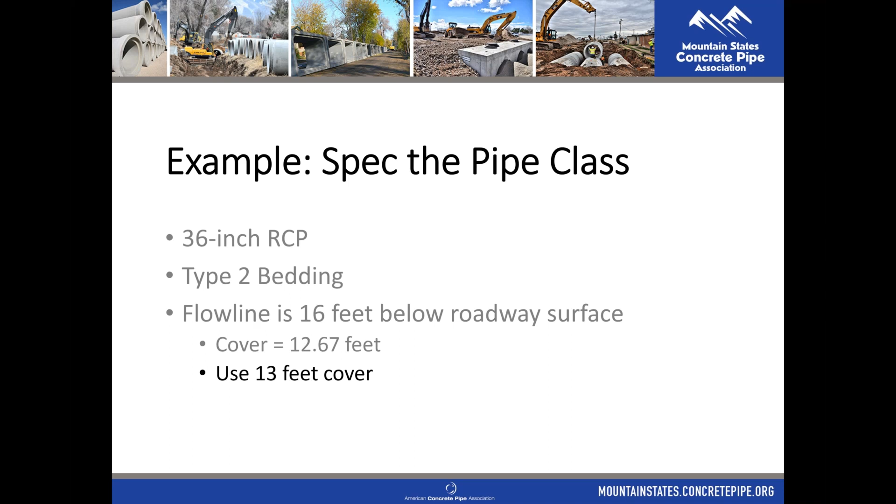So for a 36-inch pipe, we know that that's 3 feet from the flow line to the crown. And then we remember that 3 plus 1 inch, so your wall thickness is 4 inches, so 0.33 feet. So your cover on this pipe is going to be 12.67 feet. We're going to go ahead and use 13. We're going to round up on the cover so that we have enough load on there. We know we've got enough there.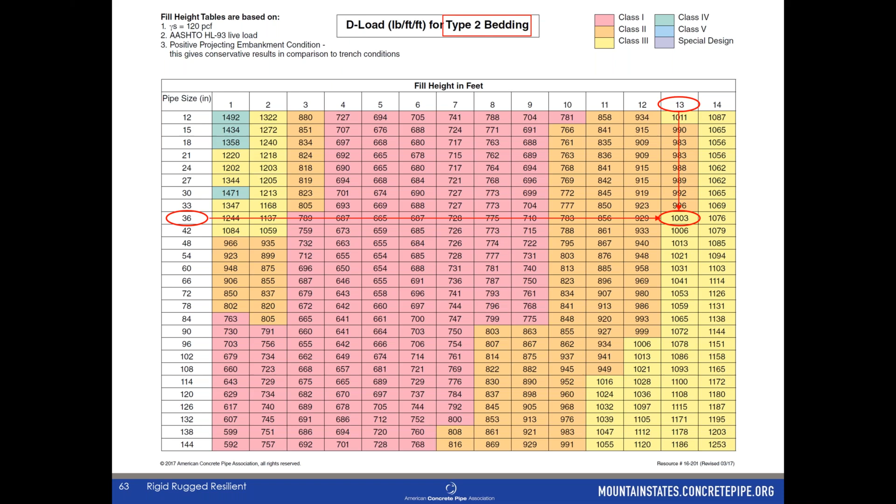Okay, so for a type 2 bedding, we're going to go over here to our 36-inch pipe. We make sure we grab the right table for the type 2 bedding. We go over to 13 feet of fill, and then we notice 1,003 pounds. It's yellow. It's between 1,000 and 1,350, so we know that's a class 3 pipe.

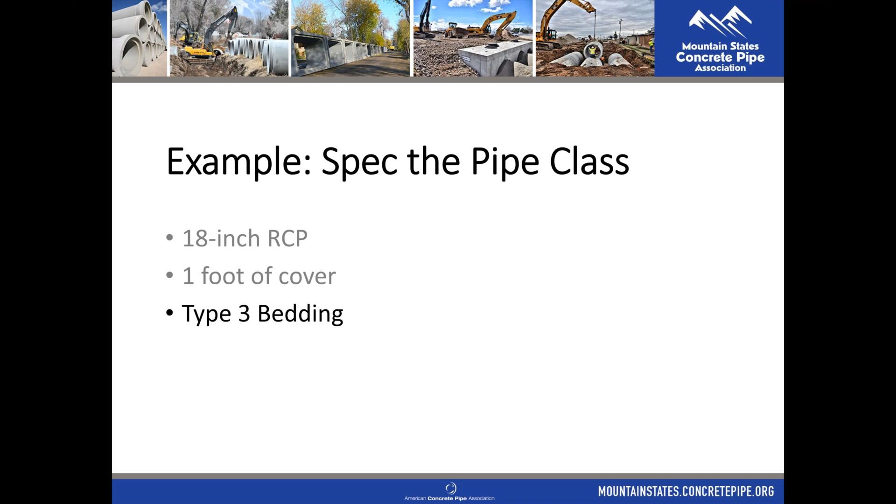All right, let's do another one here. 18-inch, 1 foot of cover. This is very common, type 3 bedding. We get a lot of calls about low cover. So we come over here to the type 3 bedding table. We go to an 18-inch pipe, a 1 foot cover. We go down, it's 1,384, so it's between 1,350 and 2,000.

We class up to a class 4 pipe for 1 foot of cover on an 18-inch pipe. So you notice some of those in the pink and the orange, it's a class 1 and class 2. For those, you would still spec a class 3. But if we get really low cover situations, you're going to see some class 4s and class 5s in the smaller diameters. So keep that in mind.

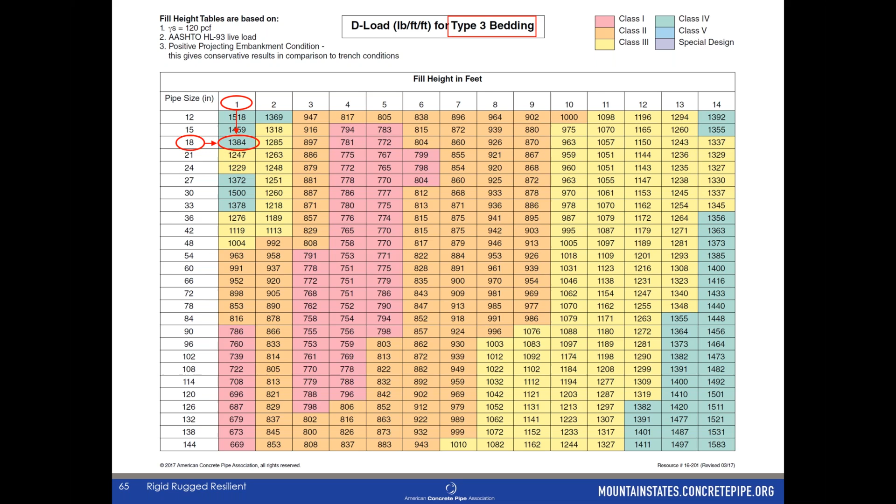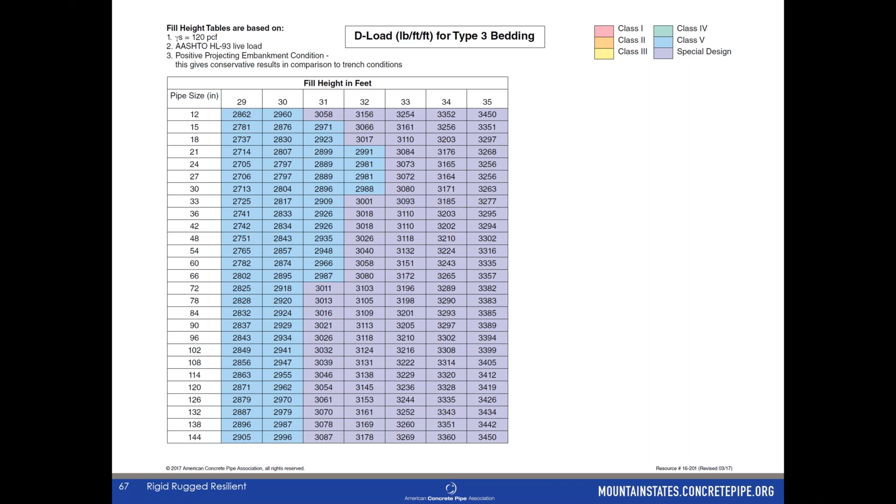Type 3 bedding, you can get up to about 30 feet, but anything above that, we can do a special design. Mike Blackham tells a story about a pipe that they did up in Montana that was 86 feet of cover. So they had to do a special design for that. Crazy.

The last thing I'm going to talk briefly about is this PipePac. This is a web-based software. If you want to get in and mess around with this, this is your direct design. Just Google PipePac, and it'll come right up with the American Concrete Pipe Association website. You log on there. This is the screen where you proceed to the application.

There's some different analyses that you can do. We're going to focus on the 3-edge bearing test today. You create your project. Besides the 3-edge bearing test, you can also do a cost analysis for pipe envelope, comparing different pipe materials. You can do a life cycle analysis comparing pipe materials, but we're going to do a 3-edge bearing analysis for our concrete pipe.

Okay, so when you do that, we're going to use ASTM and US customary units. You can use metric, and CSA is the Canadian version of AASHTO. So if you're doing anything in Canada, you can use metric, but we use US customary here.

I always say there's 2 different types of countries in this world. Those that use the metric system and those that have been to the moon. So just keep that in mind. Go USA.

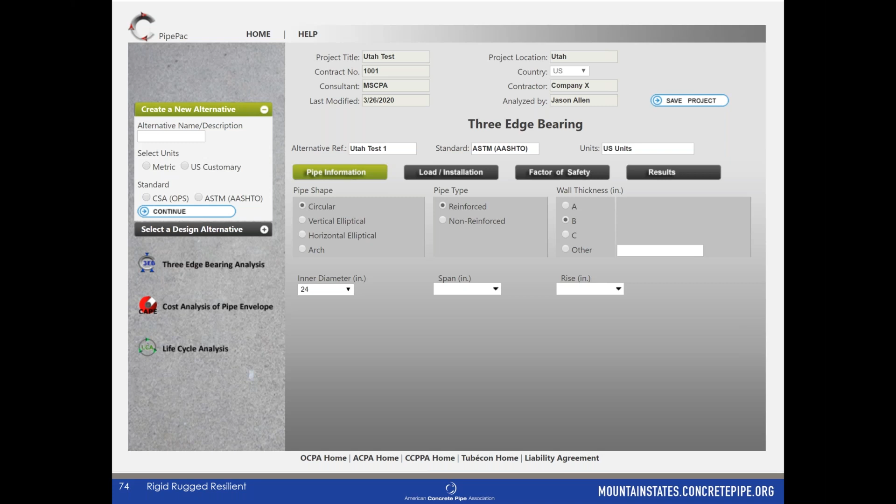All right, so when you get in here, you fill in your pipe information. We're going to look at a circular reinforced B wall for a 24-inch diameter. So you enter in all this information. You then click on the load tab. We're going to use the standard 120 pounds per cubic foot, which is what's in all those fill height charts.

If someone's requiring a different one, like a 130 or a 125, you can type that in, and you can determine how much fill you're going to have, how much you want this table to look at, and what type of bedding you want to do. You can choose just a type 2 bedding. You can choose 1 through 4, all these different bedding types.

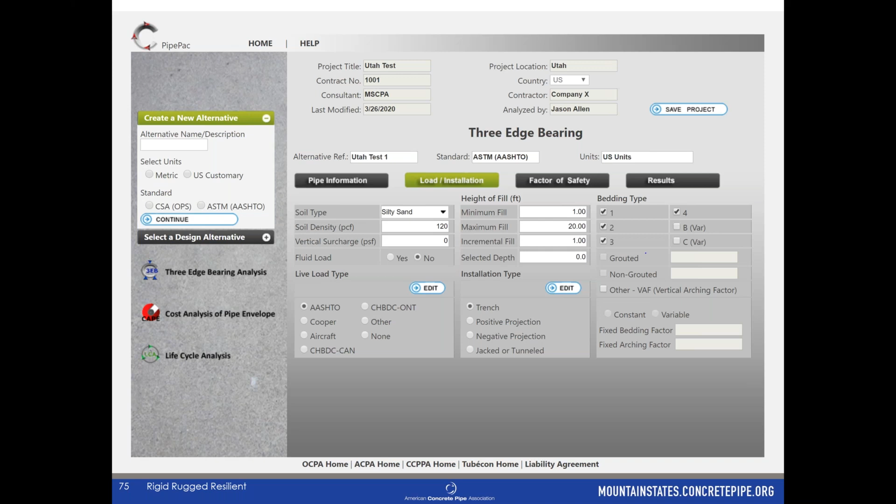And then when you click analyze, on the results page, this is what comes up. It has a summary of all of your inputs, and then it gives you this table here. So you can go in and say, okay, for the type 2 bedding, we did analysis on a 13-foot cover for a type 2 bedding.

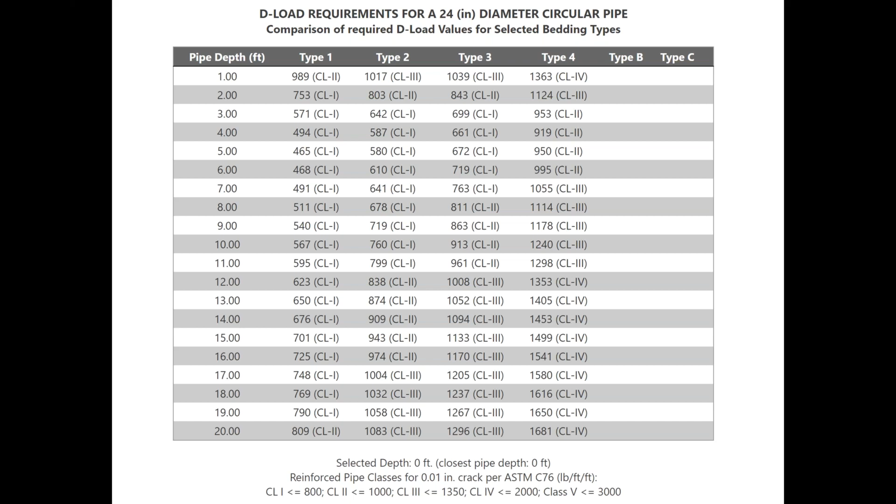If you notice there, this one we did for a trench installation. Remember, that other one for the fill height charts was embankment. This one I did for trench. So you notice that for an embankment, it called it out as a class 3, but for this one, it's a class 2. So it's kind of interesting how it changes a little bit there, what the loading is. So keep that in mind. Things can change a little bit depending on the diameter and the type of installation and the embankment there.

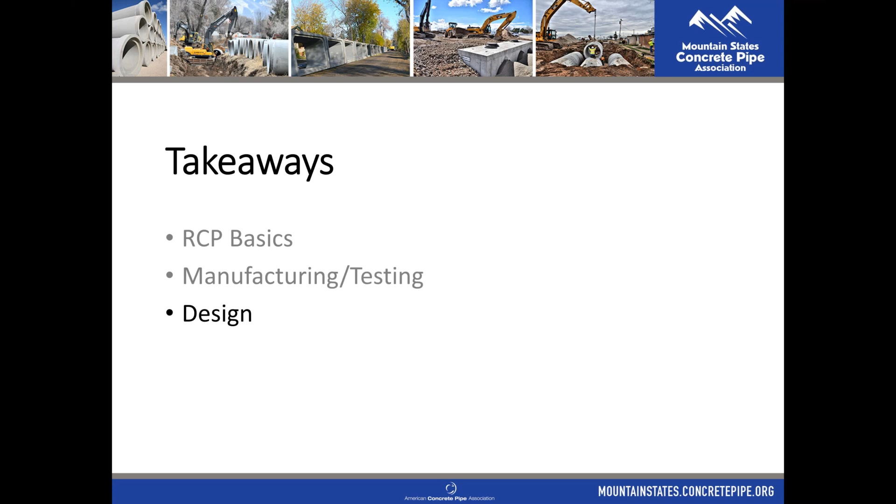So the takeaways from this, obviously we talked the basics of RCP. We talked a little bit about manufacturing and testing, and then how you can design and what you should include in the specs. Hopefully this was helpful to you.